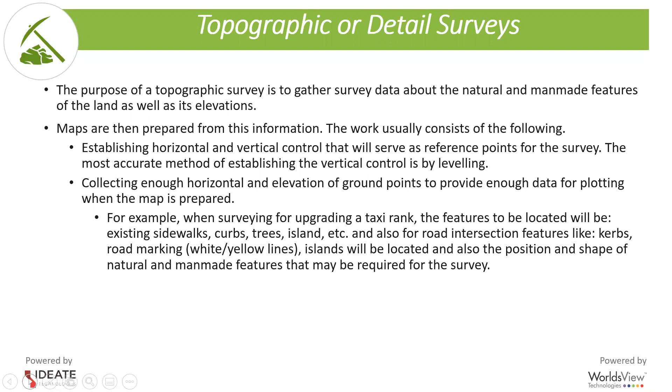The Hiper VR's got a long range link, so you should not have a problem using this instrument in cities to survey long roads and long distances. If we look at the instrument itself, the Hiper VR is basically the new technology launched in the world. It's got the tilt function. If you measure up to close buildings, you need that little bit of tilt or degree slope in it to get more satellites. This is the unit to use.

This is also a small unit, so the batteries are internal batteries. On a fully charged battery, you should get up to 6 to 10 hours work on it. It also comes with the Magnet Field software on the controller. What makes the software unique is that if you work with the software on the GPS, you should be able to work with the same software on a total station. It is Windows-based and it's quite user-friendly. It's got a unique Bluetooth link, so if you connect from your controller to the rover to start it up on a known point, it's got quite a good, strong Bluetooth link.

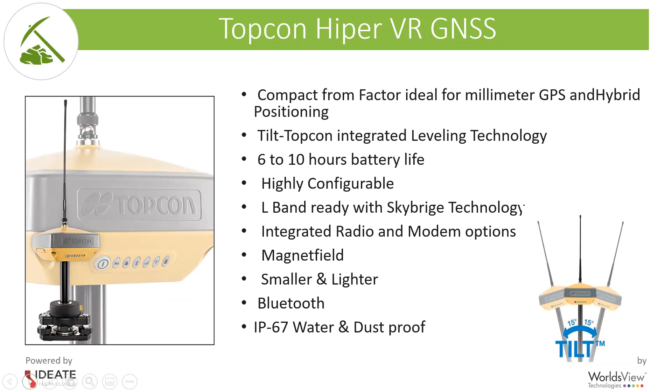This unit also has an IP67 water and dust proof rating. So it means it's quite strong if you look at dust and waterproofing. It will give you a 6 for dust and a 7 for water. And for GPS systems, that's quite good.

If we look at the unit itself outside, that's always a question that's raised. If you look at the buttons and the lights, what does it mean? So firstly, we've got the power button that sits there in the front. Then you've got a little green button that will show you the status of the rover or the base. It will show you if it's fixed or float or autonomous. And then you've got the recording button to show that it is recording. So it's taking a reading and it's taking it in if you look at static surveys or post-processing surveys.

It's got the Bluetooth light there. So the Bluetooth light will change from a white to a blue or green to a blue the moment the Bluetooth is connected. Then it's also got the RX-TX light that will show you the indication that it is running. Then the last light you'll see there is the battery power. So if you've got a fully charged battery, it will be green. If it's not fully charged, it will be orange. And if it's from 50 to 0%, it will be red.

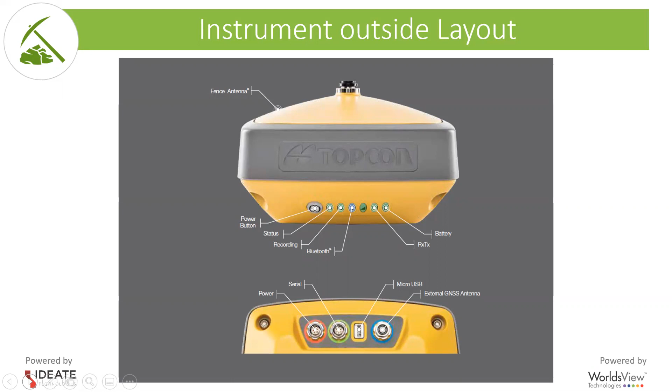Then if you look at the bottom of the unit, it's still got the power port there. So basically for external power, if you want to connect a battery to it to get longer life on a base. Then the serial communication port. Then the micro USB port for downloading of static surveys or post-processing surveys. And then it's got the option for the external antenna. If you want to do long-range surveys further, you can put an external antenna on it and use it that way.

Some other specs I want to show you. So highly configurable. If you look at the unit, how small it is, it will fit in the palm of your hand. So it makes it lighter and you can carry it around a lot easier. The other thing, it's got the L-band technology, ready technology from Topcon in there. So basically you can connect to most of the satellites that are available now. And also if you look at the radio and modem, it's quite unique and the new technology is there. So basically if you buy a unit like this, you're in the new technology and it will last you for years.

Just quickly an overview. So we call it our value proposition. So if you're on a construction site or a mining site, this is definitely the unit to have. It's rugged, it's user-friendly. Unlike the competitors in the market, this unit has been manufactured in Japan. So it is Japanese quality, and it's not something that you need to replace every 3 to 4 years. This is a unit you'll be able to buy to use on roads, construction sites, on building sites, and even in the mining environment. It's rugged enough to handle it, and also you'll be able to let your normal foreman use it, not just a surveyor, because it's very worker friendly.

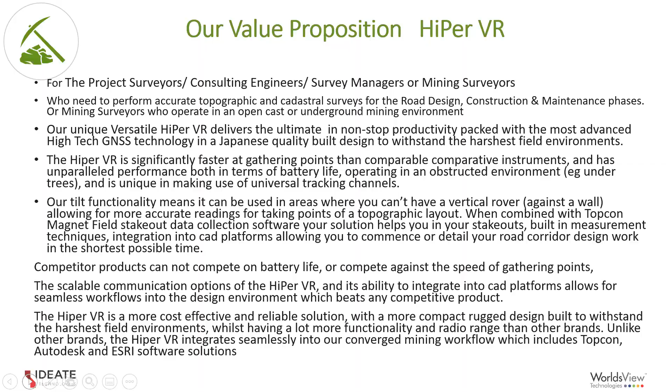Then the next field promotion instrument is the GM55. So if you look at a GM55, we call it the old rugged Isuzu or Toyota bakkie on the sites. This is a little instrument that's built for the toughness of the environment. It's got a very high IP rating. It's got a very strong EDM in it. And it's, I wouldn't say a basic instrument, but it's an instrument you can use right through from your normal small operation to a large operation. And this instrument will also last you a couple of years. If you look after this instrument it will definitely look after you.

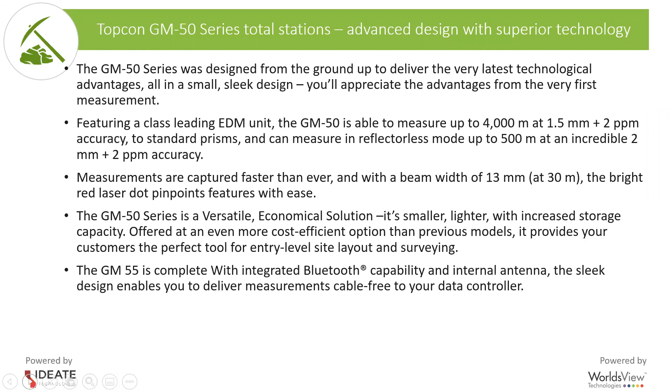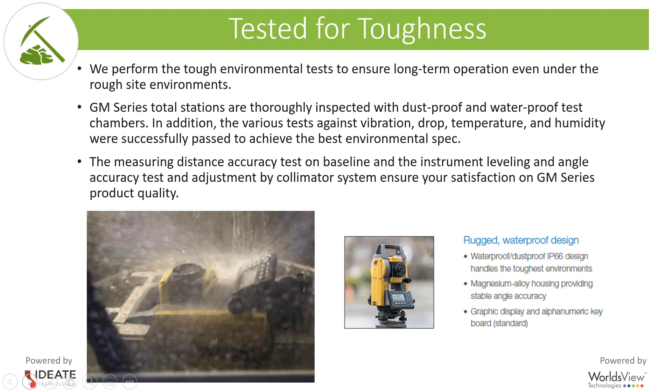If we look at the ruggedness and toughness test, they've really gone through the testing to say that this is water and dust proof up to IP66. So it's quite rugged for the environment. If we look at the instrument itself, it looks like a little small instrument that you can carry around on site. If you do a lot of surveys on site, we need to set out a few points. This is a little instrument you can carry around without any problem. This instrument will also work nicely in all temperatures and all environments on the Africa continent.

If we look at the spec of the instrument, it's got quite a strong EDM in it. It measures 4,000 meters to a single prism. Battery life, a fully charged battery will give you up to 14 hours work on site. It's also got the TSshield function in it. So basically what that means is if you register this instrument on your company's name, you'll be able to track it wherever it is in Africa.

And this instrument, if something happens to it, you can send a code to it that will lock the instrument up and no one else will be able to work with it. So for instance, if someone steals the instrument, you can send a code to it. They'll not be able to use it. You can send it to a Topcon dealer, or you yourself can unblock it. If we look at the TSshield, it's also got the function where it will send you alerts on updates that are available. And by the cloud, you should be able to update it if there is anything available.

This instrument also downloads via USB, Bluetooth, and serial communication. So the days where you've been on site and the guys phone you back to say, I can't get the data off because the cable is broken, now you can use the USB or Bluetooth.

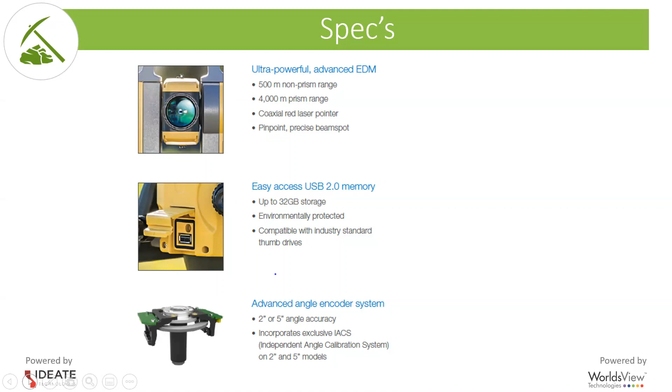Just some other specs I want to show you. If you look at the telescope, inside is your EDM, that's your 4,000 single prism measurement EDM, and 500 meters to a non-prism. The USB port is situated next to the instrument, so you can flip it open, press your USB in, and download or upload data. It's got an advanced angle encoder system, giving you a 2-second or 5-second angular accuracy.

If we look at some of the survey methods the guys use for this total station, this is the wording out of how it's used in the software. Topcon will call it a topo survey.

Then there's a resection. If you set up the instrument at an unknown point and can see 2 known points and want to know the point where your instrument is, you can do a resection. 3D coordinate surveys basically means if you've got a 3D plan and someone gives you the coordinates, you can upload those into your instrument and survey with it.

And then also, if you've got a known point for the site and need to set out boundaries for a new site, you can go and stake out those survey points on site.

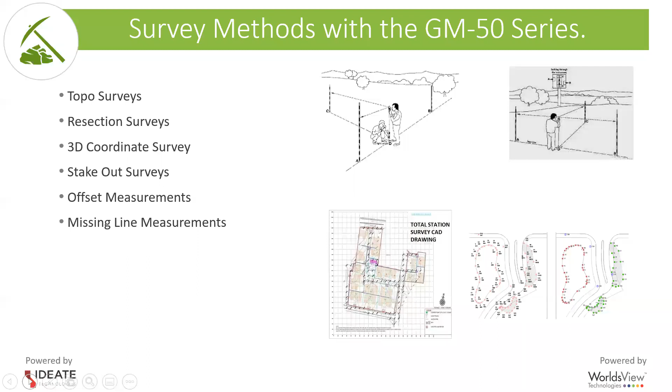And then offset measurements, a lot of us call it tachy shots, but offset is if you want to take a lot of points on a site for planning, developing, or a project - tender planning or tender projects. And then also missing line measurements, so if you want to set out a line next to a known point, you'll be able to do it as well.

Then on the outside of the instrument, a lot of people always ask on site about buttons and wheels and stuff like that. So this is basically your instrument outside, where it's got a telescope, a leveling wheel, the horizontal and vertical locks on it. It's got your keypad, you can see that. And then also it's got a little antenna there that's called the LongLink antenna.

So there is an option to basically use this instrument as a manual robotic. It will not be a full robotic, so you still need 2 people to operate this instrument.

Of course, it shows you there where the TSshield sits, basically in the handle. If you remove the handle, be careful - usually it needs to come back for a calibration and a check on the handle. So otherwise you never need to remove the handle.

Then the laser plummet, so you see it's blanked off. If it was an optical plummet, it would have been optical there and not the laser plummet.

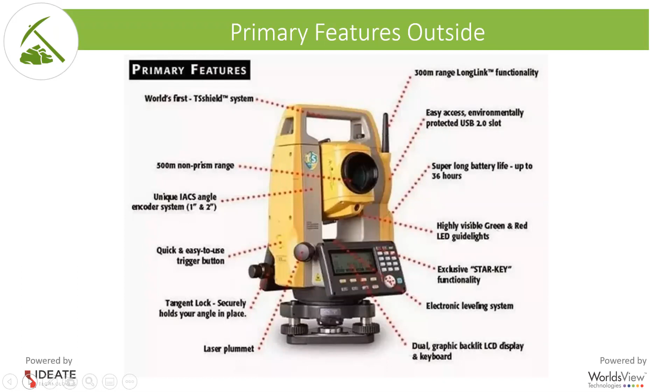Then the value proposition. This instrument is suitable for all construction and building sites and open cast mines where they just need to do normal tachy surveys on surface. This GM55 is highly quality from the Japanese factory, so it is Japanese quality and not Chinese quality. The instrument is rugged, and believe me, this instrument will take a lot of beating before it goes down.

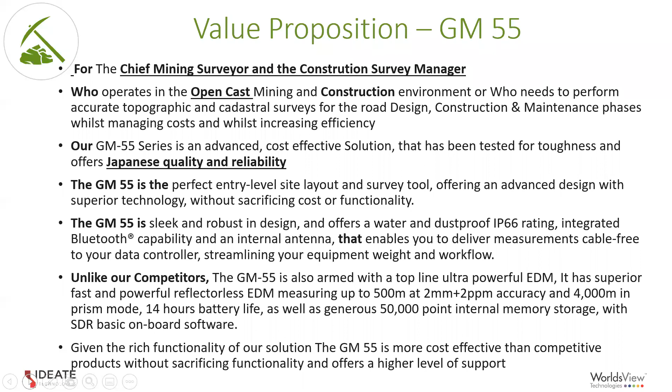It's got a very strong EDM, and it can also store up to 50,000 points in internal memory. So this is an instrument you can take to site, the guys can work with it, do a lot of surveys, and then download the data. If you look at the GM55, this is the little workhorse you want on all the sites. If you want one instrument that can handle the roughness, the toughness, the rain, the weather, this is the instrument you need on site.

Then if we look at our next field promotion instrument, it's the OS 103. The OS 103 is a Windows-based instrument, so this is where we go up to basically all the new modern technology. It comes in a 1 second, 3 second, and 5 second accuracy. It's got an extremely strong EDM as well. It's got a touch screen and a keypad, so you can either use the keypad or the touch screen.

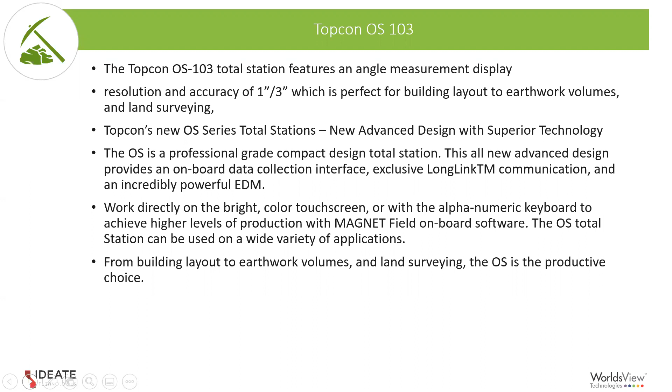It's also got the MAGNET Field Windows software on it, so it's the same as the GPS. If you're able to operate the GPS, you should be able to operate the total station. What makes the OS special is that it's Windows-based firstly, but if you look at the battery power, a fully charged lithium-ion battery will last you 20 hours in the field.

It will also measure up to 4,000 meters to a single prism, 500 meters to a non-prism, and it's got the TSshield function where you can register it on the company's name. Again, you can download via USB or Bluetooth for serial communication.

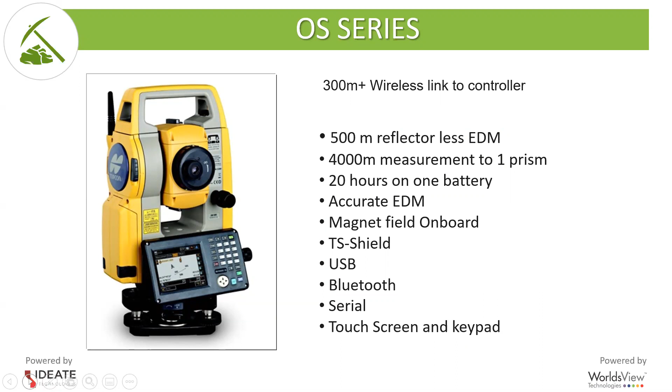So in the picture there you can see the touchscreen and keypad. You can actually see it's quite bright and it's also very worker friendly. If you can operate your cell phone, I guarantee you should be able to operate this instrument.

Just the outside spec of the instrument. Again, you can see the leveling wheels there and also the vertical and horizontal lock, the touchscreen, the keypad, and the battery cover.

The side mount cover opens up, you put the battery in there and it closes. Same with the USB, the easy access opens up, you put in your USB, upload or download your coordinates, and you'll be able to take it into the office without taking the instrument with you.

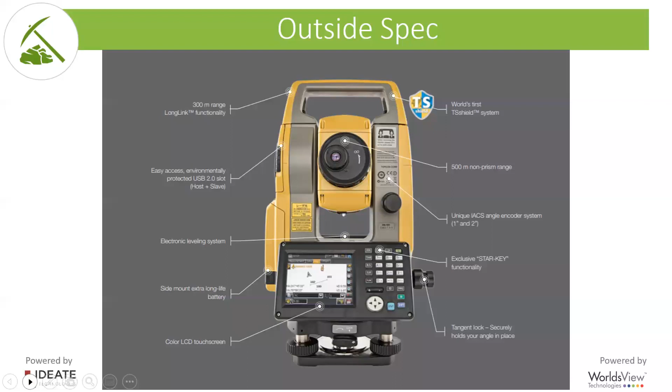Secondly, if we look at the definition of tough, the instrument's got an IP rating of 65. Because it's got a big screen like that, everybody thinks it will not last, but it takes a lot of beating and can handle quite a lot.

It comes with the modern Windows-based Magnet Field software, so you should be able to use this as a Windows-based instrument or as a Windows-based phone. It's quite easy to operate, and basically, if you have 2 days training on this, you should be able to operate it.

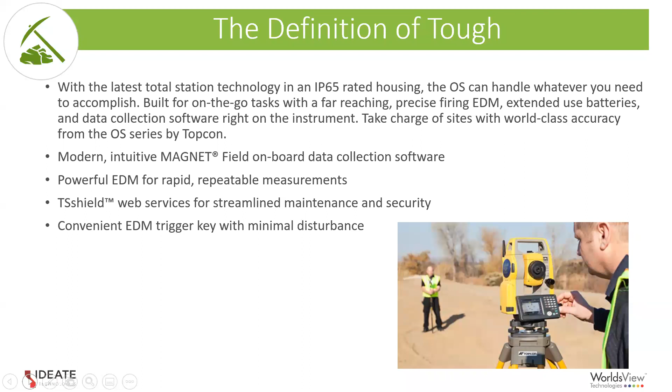Also on the side of the instrument, they've got a measure button, a trigger key if you can call it that. It makes it a lot easier for you to take a measurement without moving the instrument on the front of the keypad. Just basically click it on the side and it will operate.

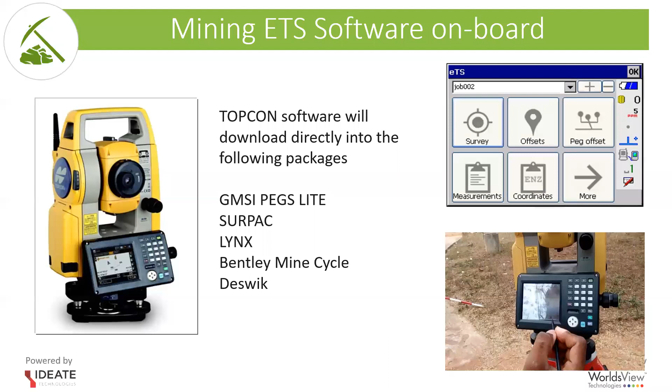So this ETS software will download directly into the software for the mine, which makes it a lot easier for them. Just quickly going to show you how they'll do a survey underground and what the software includes.

If we look at a setup underground, we need to backsight and then foresight a prism. That's usually called a single peg survey. We'll also use it again in transit, so you'll transit a foresight and transit the backsight again, and that usually helps with the limit of errors.

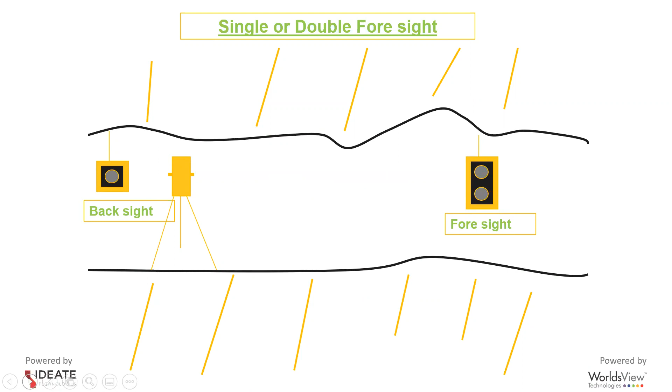If we look at a single or double foresight, basically set up on a known point, foresight again, the double prism, and then the backsight.

If we look at the multiple peg survey, we'll set up the instrument, backsight the known point, foresight the first prism, then the second, then the third, then the fourth prism, and then put the instrument in transit and start at the fourth prism again, working our way back to the first prism, eventually closing it off with a backsight.

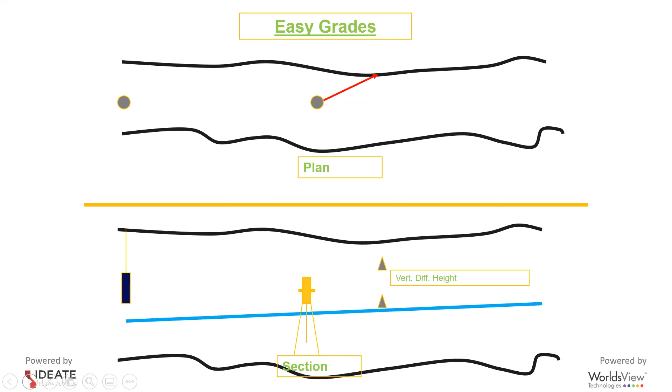Then to put grades out, we'll set up the instrument on a known point. We'll basically backsight. We'll set the vertical difference to the height of the sidewall, basically survey it. Then we'll put in the grade and it will show us if we're online.

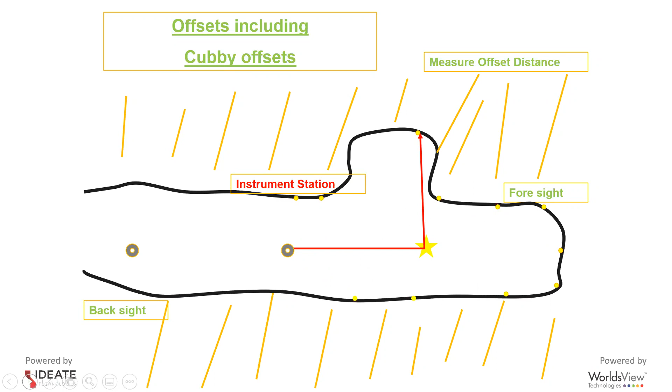Then offset, including cubby offsets, we'll set up the instrument, backsight the instrument, and do a few offsets around the mine underground. To do the cubby offset, the star is the survey helper. You'll measure to the survey helper, and he'll measure to the sidewall with a distomat or with a tape, and that's how you do a cubby offset.

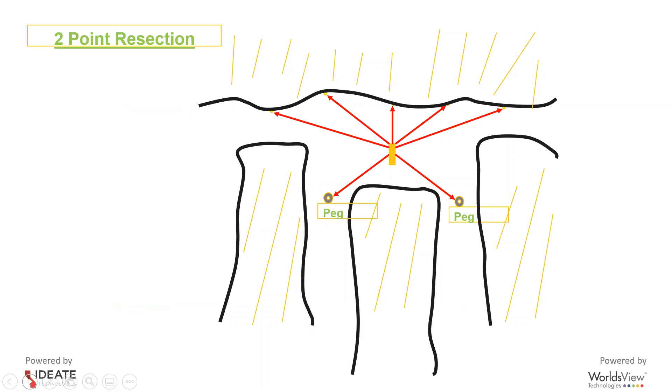If you look at a 2 point resection, basically you'll set up on an unknown point, you'll view, survey the first peg, survey the second peg, and then take a few offsets to pull it into your coordinate, and that's how you set up on an unknown point to get a known point position.

Then if we look at a line peg offset, we'll set up the instrument, do a backsight, then survey the line peg and put in a new peg, then survey a peg that's in the way, then survey the line peg, and come back to close on the backsight. That will help you survey a line peg offset.

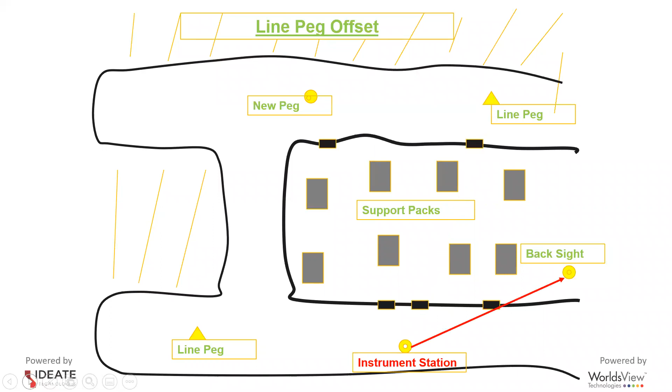If we look at the OS 103 spec, there you can see the trigger easily on the side. It's basically just a light touch of the button and it will take a measurement.

That button is water and dust proof as well. It's got a little rubber coating around it. And if we look at the telescope there, the EDM is quite strong.

It's a 4,000 meter single range, single prism measurement. It's got the green and red guide lights in there. A lot of us call it Lumi lights, but the guide light is there.

If you do a stakeout and the guy's walking with a prism, you can look back and see if he's in the middle of the red or the green, or only see the green or only the red. Then he knows to space himself to see both the colors of the lights.

The USB space there, we can see easily where it goes in, where it comes out, how to upload, how to download, and close it again and it is sealed.

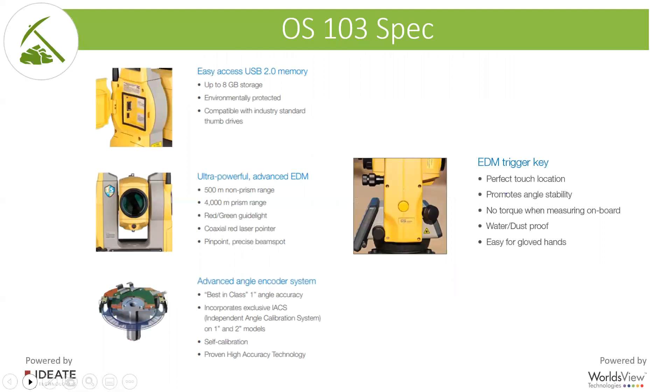For the value proposition of this instrument, this is a brilliant instrument to have on all sites. Usually the mining guys love this instrument because it comes with the mining software, designed for the Africa mines, especially South Africa. We've got a lot of those instruments running on the mine, and they're doing very well.

For a chief surveyor on a mine, this is an instrument he wants the guys to work with, because it will help the guys work a lot more faster and more accurate underground, and it will show them the error way before they come out underground to go down again.

So unlike the competitor, this is quite a good instrument because it is Japanese quality, and also because it's got a strong EDM in it.

This instrument is the OS 103, so if you want to get it in the OS 101, it is available, and it's also available in the OS 105. The field promotion is running on the 103 because with a 3-second accuracy, it's more than enough that you need on most of the sites.

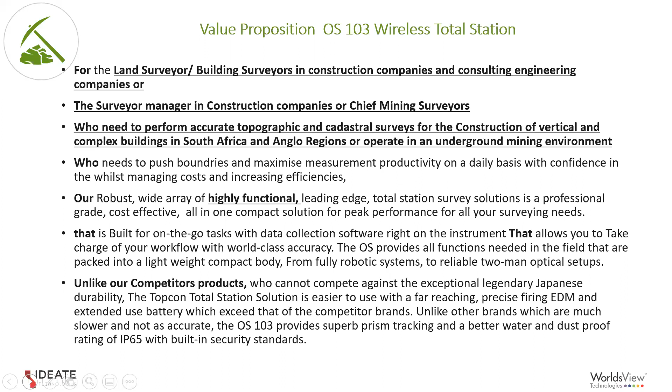It's got an IP65 rating, and it's got the security feature in it, so it's quite a good instrument to have.